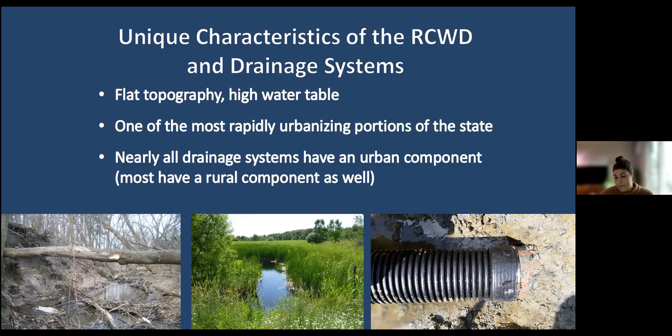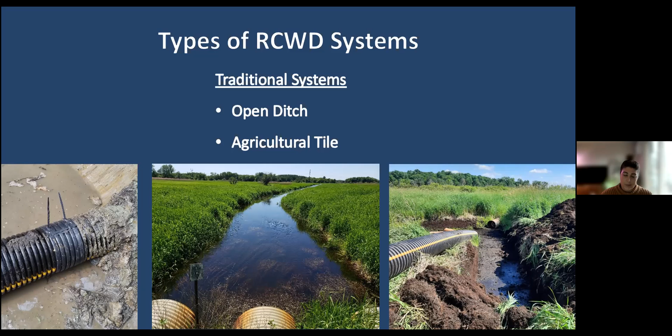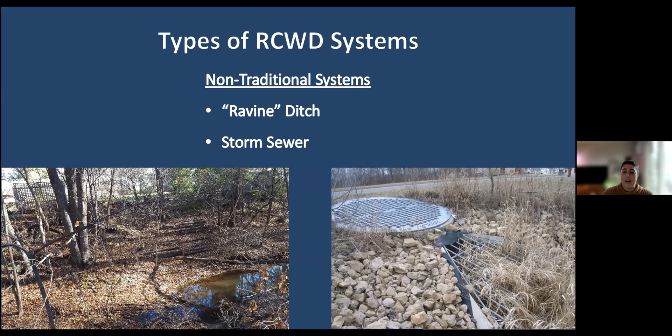In general, these conveyance systems fall into both traditional and non-traditional public drainage systems. The traditional systems are open channel or agricultural tile, as pictured at the bottom of the slide. We're working to replace all of the clay tile with plastic pipe and to repair all the open channel systems. But it's not always that easy. There are also non-traditional systems where the drainage system is located in a deep ravine or within storm sewer. Both of these non-traditional systems are found, of course, in the developed areas of the system where there's already a lack of accessibility. So that's a little about the characteristics of the public drainage systems that we manage.

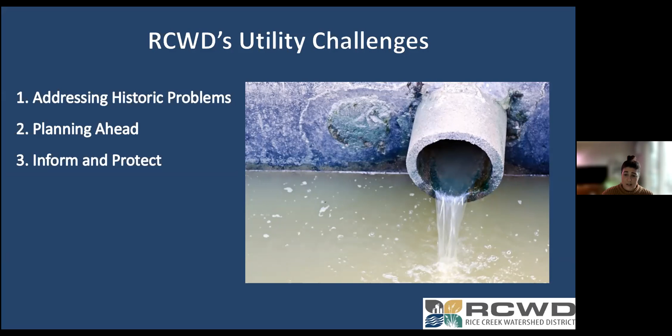Now I'll discuss the challenges we've faced and how the district has approached these utility crossings. The first challenge I'll touch on is addressing the sins of the past, or those historic problems, and how they got there. Then we'll look at our second challenge of how we plan ahead and address the installation of new utilities so that we don't run into these problems down the road. Last, I'll wrap up with our third challenge of how we inform the public and utility companies about drainage systems to prevent unauthorized activity from occurring on the systems.

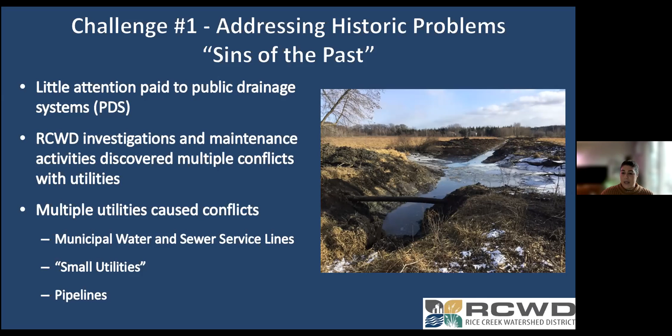So the first challenge, sins of the past, the historic problems. Historically, little attention was paid to public drainage systems when utilities were being installed. I'll touch a little more on this in a few examples, but the district found, as it was investigating and maintaining drainage systems, that there were multiple conflicts with a variety of utilities. We primarily run into three categories of conflicts: municipal water and sewer service lines, what we'll call the small utilities, and then the big ones, the pipelines. The picture to the right is actually a pipeline spanning over a ditch bottom after a system was repaired.

So the first example, for municipal water and sewer service lines, these utilities were often installed during projects permitted by the district. But at the time of permitting for many of these utility installations, the as-constructed and subsequently improved condition, or the ACSIC, was not established, and the historic record was really unclear. To resolve these historic problems, the districts needed to investigate the historic and current function of the system, and many of these systems have gone through a records reestablishment process already. This is a running theme for all system crossings: the ditches were there before the utilities, but we do need to establish a clear record. For these municipal lines, when we find a drainage system conflict or obstruction, we have to weigh the cost of lowering the utilities versus the potential value of the restored function.

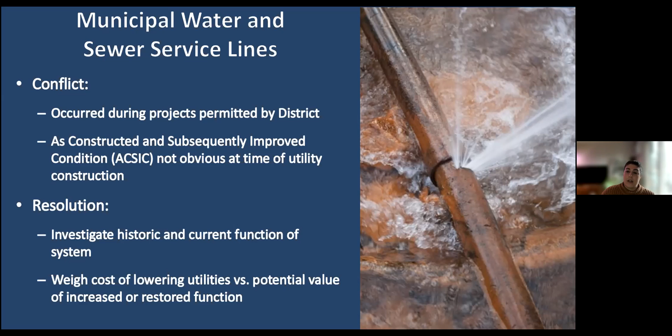Our most recent example is along Anoka Washington Judicial Ditch 3, which we'll call JD3. JD3 needed significant maintenance and repair. The system is primarily surrounded by residential neighborhoods, with some agricultural areas located further upstream. During investigation for the large system repair, we noted that a road culvert was about 2 feet above the ACSIC, so we dug into it and discussed with city staff. We found out that right below the road culvert there was a water main and other utilities. So we looked at the cost to lower that culvert. Turned out to be just a smidge at $45,000.

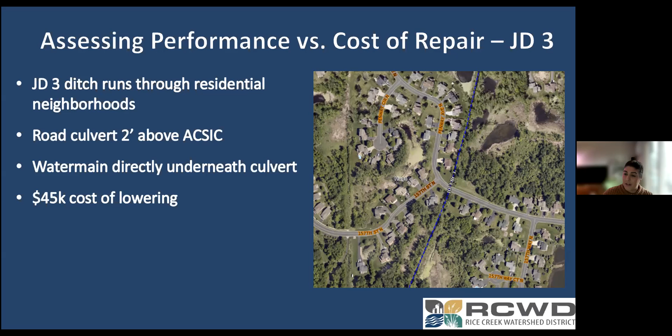So what do we do? We had the district engineer model the conditions of the system with the existing culvert and with it lowered. The model indicated that lowering the culvert would only decrease flood elevations by about one-tenth of a foot, and that decrease was localized and really didn't extend to portions of the system upstream, which were still in agricultural use. The nearest ag field is actually over a mile upstream of this crossing, so that far away there really would be zero effect from lowering the culvert. We brought this information to our board, and they determined at the time that it's not necessary to lower the culvert. However, we made it very clear with the city that they will be required to lower the culvert at the time the utilities are going to be replaced, which may be down the road quite a while, but it's there—we acknowledged it, and it's on the record that it needs to be lowered.

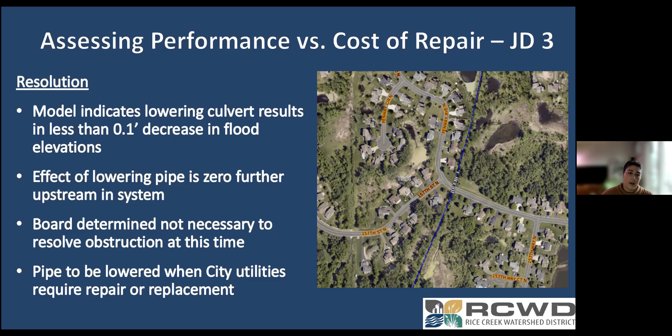So, small utilities. We frequently encounter these service lines adjacent to or in line with the road crossings of public drainage systems. Typically these crossings, the road culverts, were installed above the ACSIC profile because they were just slapped on top of the sediment rather than excavated down to a channel bottom. Same as the municipal service lines, we approach this problem by clearly identifying the profile and the ACSIC, then requiring the company to lower the utility. Oftentimes that requires that we be very persistent and actually try to get crews on site to observe the situation. Thankfully, these utilities, being a little bit smaller, are typically easier to lower and much cheaper.

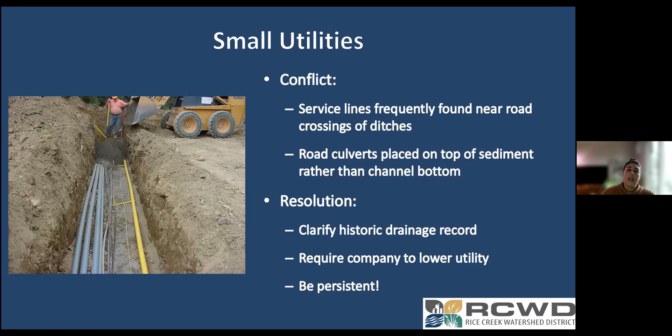But what's not easy to lower? The pipelines.

So how did the pipelines become a problem? Well, oftentimes pipeline companies are completely unaware of the existence of public drainage systems, much less the significance of the systems. Here's a couple pictures from different angles of the same pipeline crossing. This is an example along JD3, which I touched on with the municipal crossings—JD3 is kind of just our poster child for problem utility crossings. The picture actually has 3 pipelines in this area, both active and abandoned lines, and of the 3, there are 2 that are exposed above the ditch bottom.

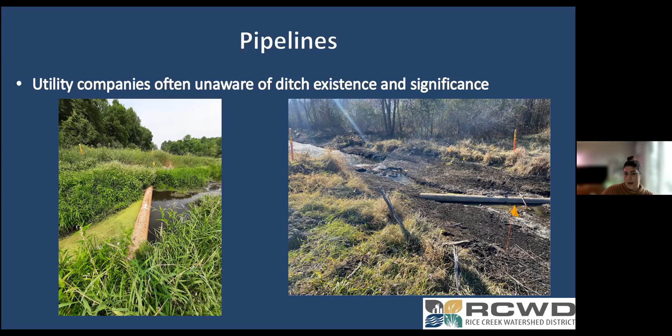So continuing along the JD3 example—Ashlee, if I may ask a question on the previous slide: those pipelines that are there and exposed, are those natural gas pipelines or oil pipelines, do you know for sure? I believe these ones are petroleum. Perfect, thank you. I could double check with Chris. There's multiple crossings—the pipeline crosses the system actually multiple times in multiple areas, and I think they're all Koch petroleum, but continuing along that example.

So the Koch petroleum pipeline crosses JD3 in multiple spots. JD3 is actually considered a public watercourse in addition to a public ditch, which means crossing the system requires a license from the Department of Natural Resources, Lands and Minerals Department, as well as a permit from the district. Koch obtained its necessary license from the DNR but did not contact the Watershed District. Even though the DNR license required permission from all other agencies having authority, it didn't clearly identify those authorities. So how do we handle that? Frankly, we just notify the pipeline company of its obstruction and the responsibility to lower it, which is, obviously, a very cheap and simple task that they're thrilled to take on.

But Chris Otterness with Houston Engineering will be talking about this a little bit later in his presentation.

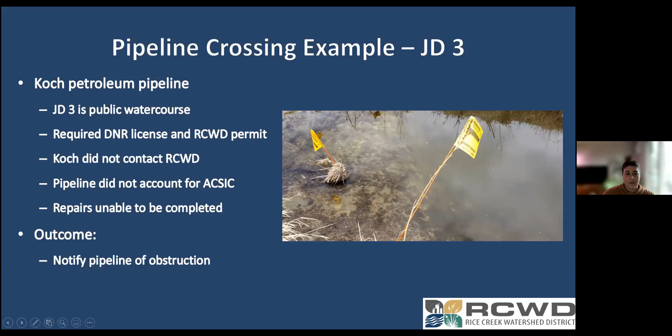So that's the historic problems and how we've approached them, notifying the utilities of their responsibilities and working to make sure that there's not an obstruction. So now what do we do currently to plan ahead and address new utility installations so we don't have these historic problems in the future?

Well, what we've done in the district is incorporate an entire section into the district rules to address public drainage systems. The rules state that a utility may not be placed within the right-of-way of a public drainage system without first obtaining a permit. The rules further state that 5 feet of separation from the system is required, and record drawings and the NAVD 88 data must be submitted to verify the separation.

Occasionally, unique site-specific circumstances arise—Tom touched on them, the real life in the ground situation isn't always what we design. So it requires a closer look: if the 5 feet of separation can't be met, what do we do? But no matter what, at the end of the day, the utility company is responsible for their crossing.

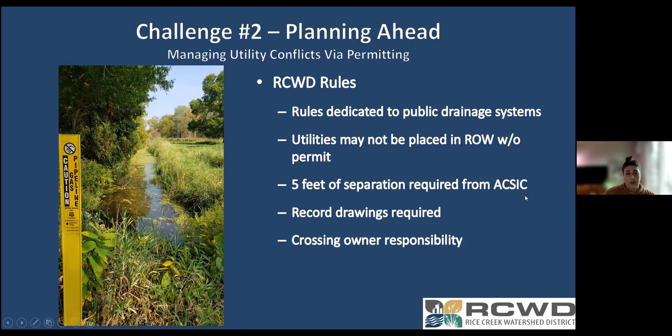So we've got the rules. How do we apply them, specifically to utility crossings? The biggest thing is staff encourage pre-application discussions, especially when a drainage system is involved. A drainage system issue, if it arises during the process, can really extend the permitting process and make for really disgruntled applicants if we don't have those discussions ahead of time.

So once an inquiry or even an application comes in to staff and it's identified that it's along a public drainage system, the permit staff immediately engage our drainage staff. Drainage staff are immediately notified and have a chance to give feedback right away to permit staff: is there a concern on this area? What do we know about it? Is there anything on the landscape that developers, anybody looking to do work, should really be aware of?

During the permitting process, a maintenance declaration is required, and we incorporate language into the permit requiring notification to drainage staff before work on a system begins. This requires that both our permit inspector and our drainage inspectors work together to ensure that the drainage inspector can actually be on site during the work on the system, because once that final product is underground, it's very difficult to verify, and it's a very expensive fix if something needs to be changed.

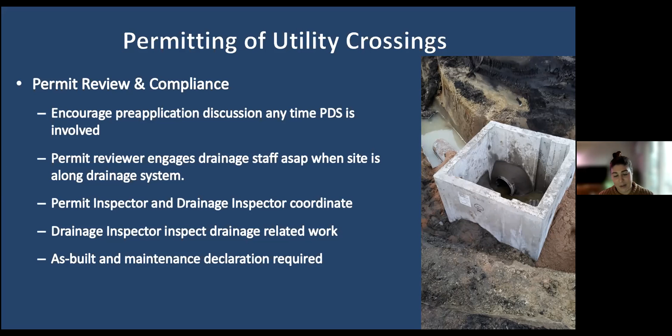Another example is Ramsey County Ditch 4. This is in a developed area, and as part of a redevelopment project, an applicant was proposing a new sanitary sewer to cross under the ditch. The sewer system is a gravity system with a fixed outlet elevation.

Unfortunately, the fixed outlet elevation limits the depth of the utility installation, and they were only able to propose 2 feet of separation instead of the required 5 feet. The sanitary sewer installation has a much tighter grade tolerance, so there was a better level of certainty that there would be at least 2 feet of separation, whereas for bored utilities, there's kind of an unknown as to the depth they'll be at as they're just moving along and boring the utility.

Because they were unable to meet the 5 feet of separation requirement, the utility was placed in a steel casing to protect it from inadvertent disruption during any drainage maintenance. In addition to the protection, the casing also acts as an indicator of the utility's presence if we have an overzealous excavator. Another good option is using insulation sheeting, the bright pink or blue foam, as an excavator or operator is moving through the earth. It's a change in material, so hopefully they feel that, and if they don't, they at least see the bright color and know that there's something unusual and they need to be careful.

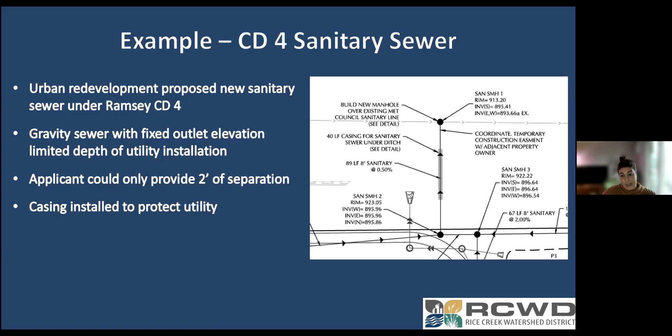So how do we prevent unauthorized activity on public drainage systems? The permit program is really only effective if an application is submitted and they follow through in the process. We have quite a few examples in our district, even from the recent past, of unauthorized work that has affected public drainage systems. Sometimes it's simply a lack of knowledge that a permit was needed, and sometimes it's a lack of desire to comply.

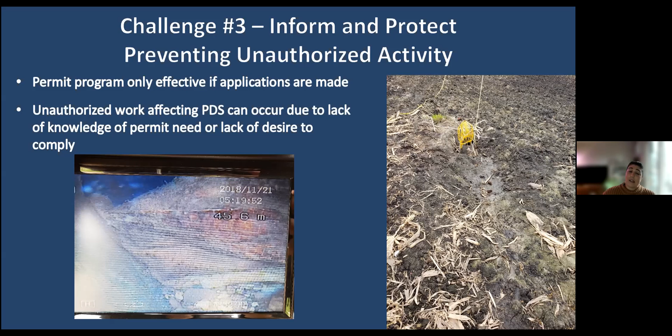So how do we ensure compliance, since not all unauthorized work is as obvious as this example? The biggest thing is communication—increasing awareness by increasing communications to landowners, utilities, municipalities, and road authorities. We've increased meetings before and during records reestablishment proceedings and system repairs. We'll hold at least one or more public information meetings before we even start any legal proceedings. We also meet regularly with cities and road authorities to reiterate the importance of drainage systems and the crossings and obstructions, if there are some.

We try to make the permit program more accessible and as painless as possible while still protecting the drainage system. I have a coworker who loves to say there will be hoops to jump through, but we're here to make sure no one lights those hoops on fire. So we offer pre-application meetings ahead of time, and site visits when the site doesn't match what's in the plan. We also take feedback from applicants, consultants, and contractors to better understand their construction methods and planning—what information do they need, what do we need to make sure we're all on the same page. If changes are needed, we incorporate those into rule updates.

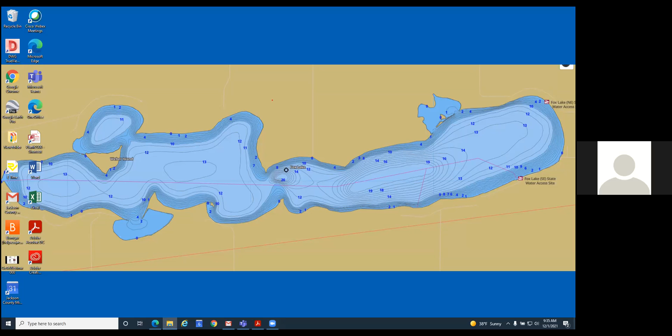I will jump back in to say, as far as municipalities treating stormwater, existing stormwater infrastructure does not get treated, but anything new is required to be treated.

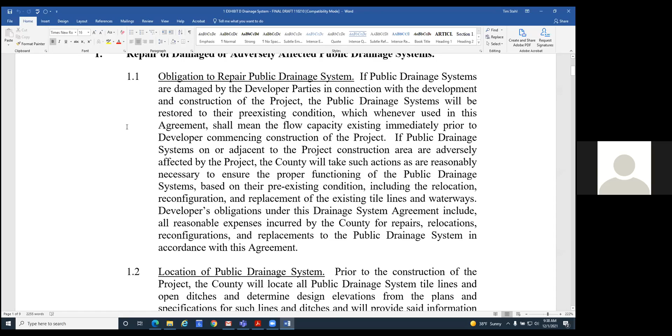In what we have found in the projects as we've gotten a bit smarter, the development agreement that we use in Jackson County makes the rounds - Rock, Murray, Cottonwood, most counties in southern Minnesota, all the way up to Clay County in northwestern Minnesota.

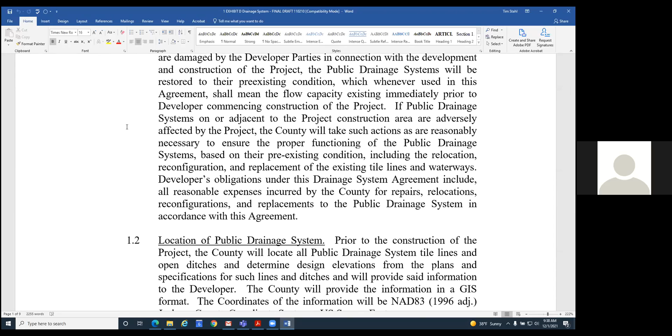Part of what we do with this development agreement is we work as much as we can with the developer. However, the developer, contractor, subcontractors - it can be very difficult.

The most important thing, even more so than the documentation we put together, as was stated by Ashlee, is the inspection. In Jackson County, we actually have a drainage crew, a drainage supervisor, and a full-time crew in the summertime. So we are able to inspect.

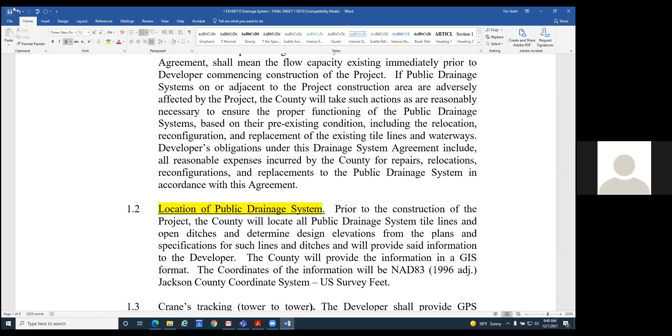And even with these large projects, nothing occurs on the county system, either the judicial or the county system, that we don't do. We don't allow work to occur on the county system unless it's us touching it. So I'll just highlight a few points that have worked for us in Jackson County.

We provide a location of the public drainage system to the developer, and that is very helpful. If you have an opportunity to go onto the Jackson County website, you'll see that we actually have an online work order that our GIS technician helped develop here in the county.

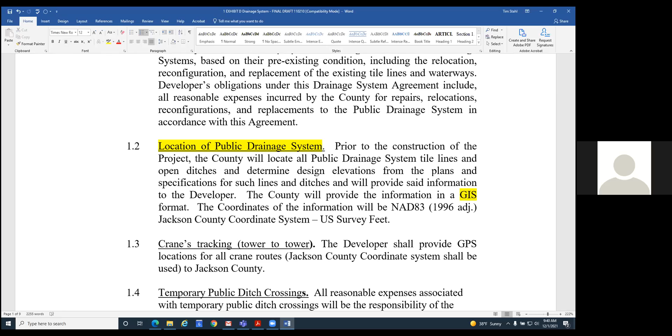We provide the information. Most of the companies are large enough that they themselves take it in GIS format, and so before they begin their projects, they tend to know where things are at.

So what can damage our systems? Well, the first thing is crane tracking. The cranes are quite large, but not just the main crane - most of the time there are two what are called RT cranes, rough terrain cranes.

A rough terrain crane, to give you some idea of the weights that they carry, is similar to 2 loaded grain carts going down the field, going down a road together. And actually in Minnesota, it is illegal to go down a road with a loaded grain cart because of the damage that it causes.

So the developer provides back to us the information in a GPS format using our coordinate system. That very much helps. Usually this is what we receive to begin with when we start working with them.

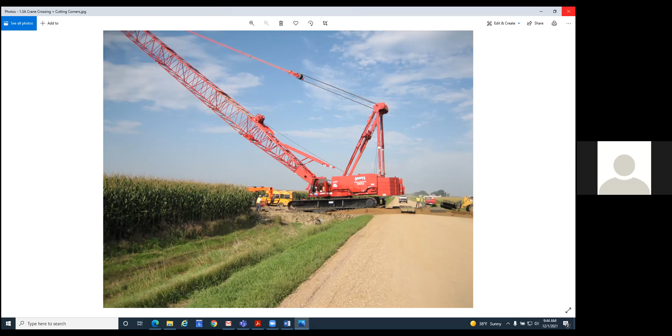So another reason we do this is for the developer. Why do they care? Why should they care? In this way, if they provide us with the crane path, then if there's a problem 200 feet, 400 feet, a quarter mile away, they're held harmless at that point. By having the crane path, we can look back and see if the problem was related to a crane crossing or was it something else.

And that has happened. We've had landowners come back and say, hey, my tile worked fine up until the crane crossed. And it actually turned out to be where he planted a row of lilacs. The lilacs had plugged up the tile line.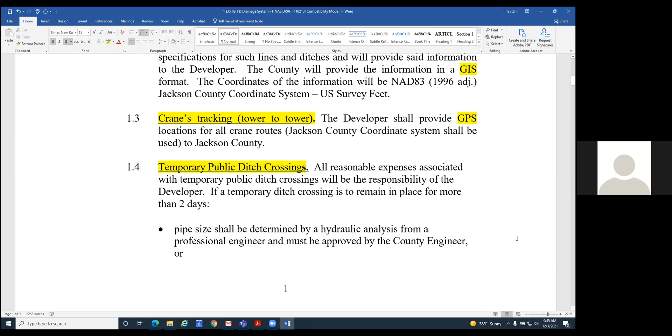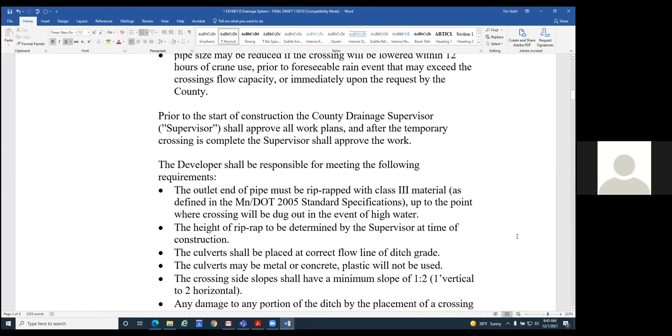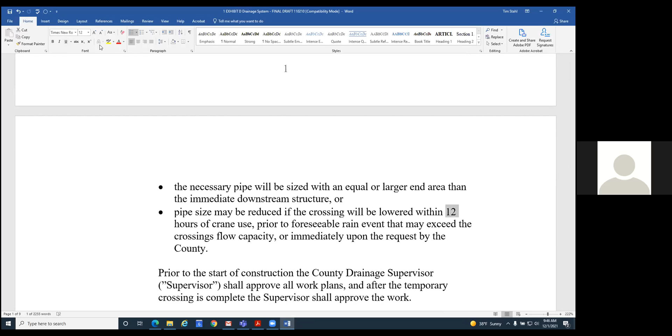Also working with the developer and contractor, here's another thing we work with them on: temporary public ditch crossings. They can occur, and they do occur. So we've set up some systems where we give the contractor some options. By having options, they seem to work much better with us. Of course, the drainage supervisor is out on the project. One of these options shows that they must remove or lower the crossing, take it off after 12 hours. That's one option. If it's going to be in for an extended period of time, there are other options for that too.

One other thing that comes with tile projects and wind projects are access roads. What we provide is basically the coordinate system of where the crossings occur, with which access road goes to which turbine. These are the turbines that they had on the projects over here.

We also share with them the depth of the tile, and the different lengths, which are probably due to whether it's a square crossing, perpendicular, or diagonal. And we treat the contractor the same as we treat ourselves in road construction, in that we replace the tile line whatever age it is, and then put two inspection tees on both sides of the access road.

Again, what is the benefit for the contractor and developer? With all the loads that are going in, it is most likely that tile will fail. However, by putting in a new tile line and having the inspection tees, we can isolate if the tile was damaged during construction.

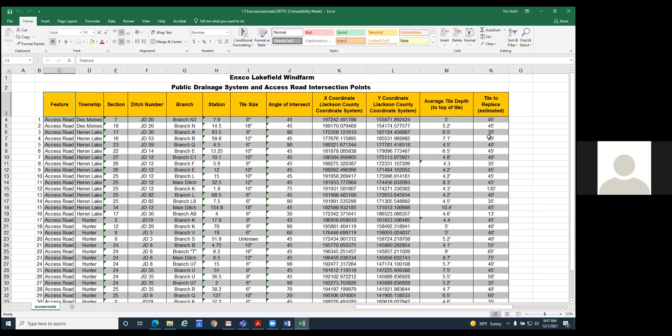We do the same thing, we provide the same information or very similar. You see these tables are identical for the feeder lines, or collector lines as they call them, between the turbines. These may many times follow the path of the crane, but there are times they do not.

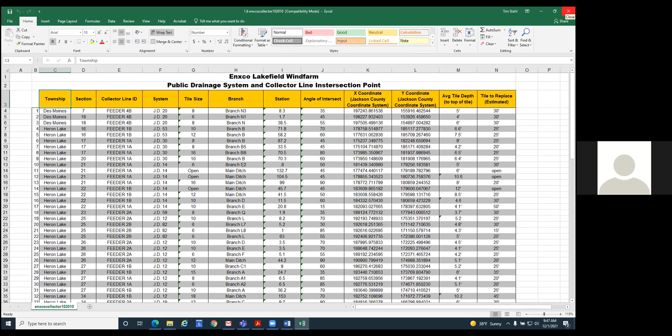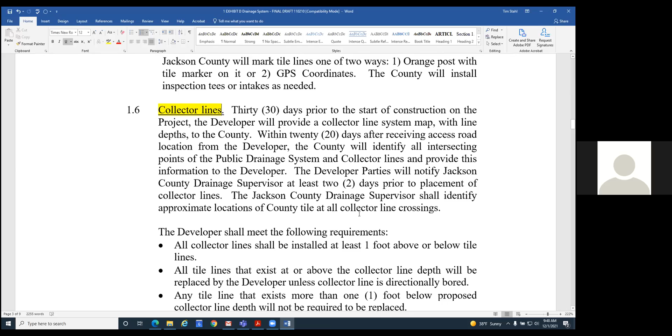And staying on that subject, the collector lines, how do we deal with them? The collector lines themselves, we have a whole list. I won't read through it. You can, if you want this information, I have a link at the end. You can email me for this.

I would also recommend just work with your county engineer because they will be focusing on the roads, but this language would be there for all drainage managers, drainage system managers.

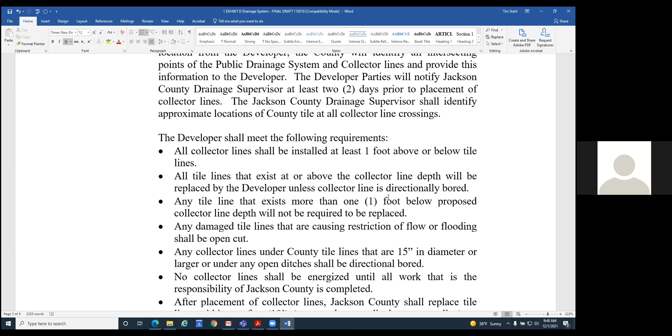What we're looking at trying to do with these tile lines is, while the collector line is not charged, they only charge it, test it, after the placement of the collector line. We, the county, go in and replace the tile line 10 feet, measured perpendicular, from their collector line. Our reasoning for that is if there's any work in the future, a repair or improvement, Chuck's going to have to deal with that, and he's going to talk a bit about that on the Enxco project. But if we have to do any repair, that definitely helps out that we've provided a safety distance for our drainage crew to make repairs. So that's an area we should not be concerned about.

The power companies state that we have to pay them for shutting down their system if we have to work by their line, and that's not something we want to do. So this is what we have done.

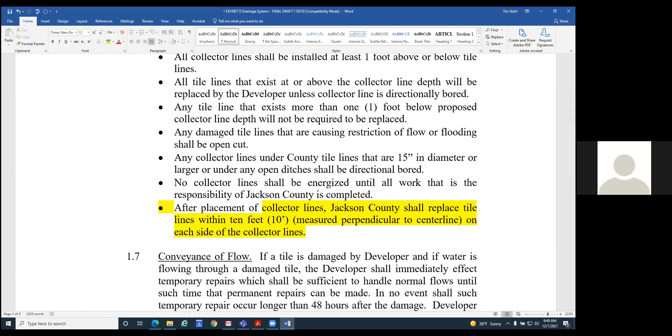And what we also do is, once we get the map back from them showing where their collector lines are going to go, with that 10-foot distance, you could see through this area, they would have quite a substantial cost to replace 10-foot perpendicular. So we do give them the recommendation to move it. It's their choice to move their line or pay for a crossing.

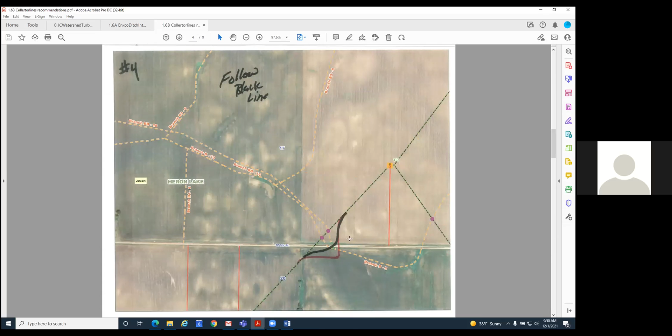Here's another example that this was actually a working copy prior to a final copy. We do require a final collector line location, but it comes in GPS, GIS form. And so it is something that our crews know going out to a site if they're going to have any problems up front. It doesn't negate 811. It just does help us out and makes the companies a lot more comfortable.

I will say, for the most part, after projects are completed, they always have a maintenance crew that, most of them, have been very good to work with. As far as I know, for the last 10 plus years, I think we're at 15 years on our first project, there has never been a time that a system has had to be shut down in order for us to do a tile repair.

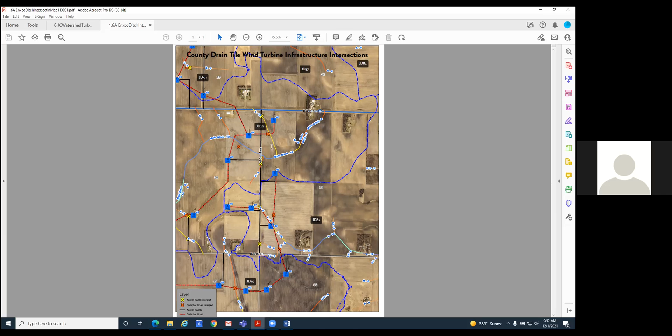I almost forgot this one. This is near the end of the whole process. So those two tables that you saw before, the Excel tables, this is a graphical representation that we have to show collector line crossings, access road crossings where tile lines have been replaced. This one does not show the crane crossings on it. After the crane crossings are done, that is still in our files, but not readily accessible to the general public.

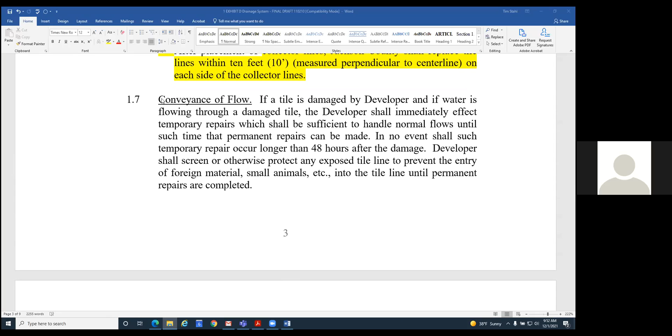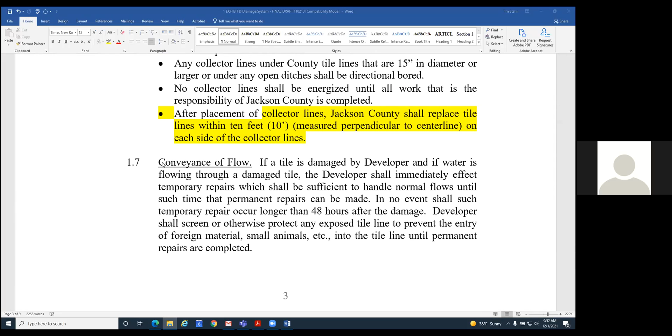Conveyance of flow, what we're trying to make sure is there is just some small stuff that if they do damage a tile, you do have so many subcontractors who never see this language, that if something's damaged, we make sure that they don't just cover it up, that we have an opportunity to see the damage and how we deal with that.

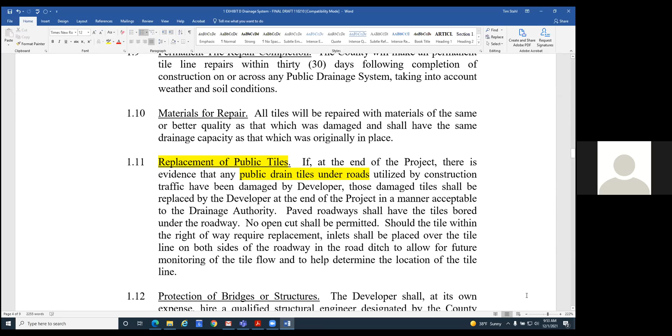One of the last things that I have is replacement of public tiles. We do require that public drains under roads, same thing there. They can be damaged. They are also responsible for that repair as well.

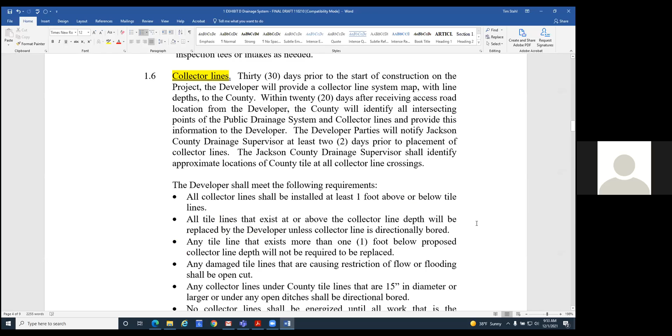And I think I'm on my last item, where I missed something here. Yep, did. A little too fast. Oh, no, I didn't miss it. Down here on 4.1, construction related damages. We said it, any damages, 2 years. That way there's no question. 2 years after the power up of the project, if there's any problems, it's covered.

We, again, have not had any problems that way. By doing the legwork up front has yielded that we haven't had any post problems. And the workers out in the field, the maintenance workers, have been really good to work with.

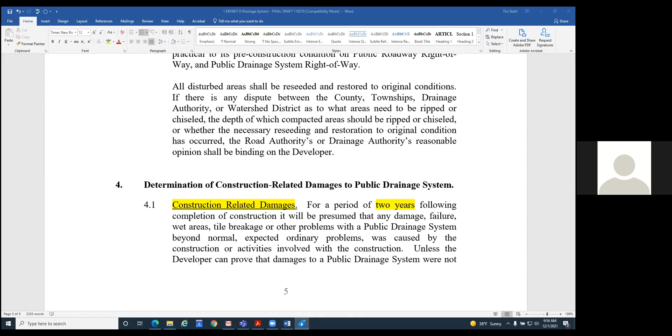And over on the left, I hope you can see, that is my contact information. I have talked and met with many other counties that are in the process of going through a large traffic generator or wind project. We currently have discussions right now in the county about a CO2 collector line between ethanol plants and North Dakota, and we would use a development agreement with that as well.

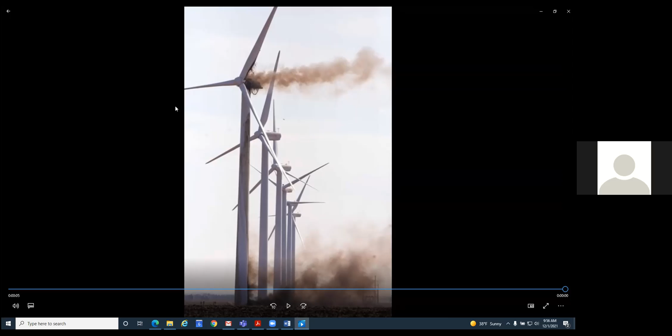It's actually probably far more detailed than a permit, because of the scope of these projects. Each turbine you're looking at there is north of $5 million. So when we have our meetings, I point out that we might be such a small cog in your system, but you break that cog and the system doesn't work. I'm not going to say all projects have gone swimmingly. The later projects, the Nexco one, was the best. We had a follow-up that wasn't so good. And on the horizon we have another 100 turbine project.

There is a benefit to the county. There's a wind production tax. Each turbine you see there produces about $5,000 worth of tax a year. The county receives $4,000 and the townships receive $1,000. So after the fact, it's a huge benefit, but there is both road and possible tile damage as the project is going forward.

Thanks, Tim. I have a question for you, and then the same question for Ashlee if she's still available when you're done. So to come up with the development agreement, was that a process where Jackson County had a template they worked off of from someone else? Or is it a process you guys pulled together and continued to improve on your own? And Tim, when you're done, the same sort of question for Ashlee in terms of how they review their permit process for utility crossings.

Easy question to answer. I have to give credit. In about 2005, I asked six other county engineers south of Highway 212, because we were all being picked off with developers doing these projects, that we sit down. So monthly we met, came up with the development agreement, a lot of the language. We were one of the first counties that wind turbines were going into that had an extensive tile system, so the drainage system was—got to give credit to my drainage supervisor, Dave Motzik. He brought the problems forward and we sat down and hammered out how we're going to put together the drainage portion of the development agreement. But credit has to go to a lot of other county engineers who took the time to help work that through.